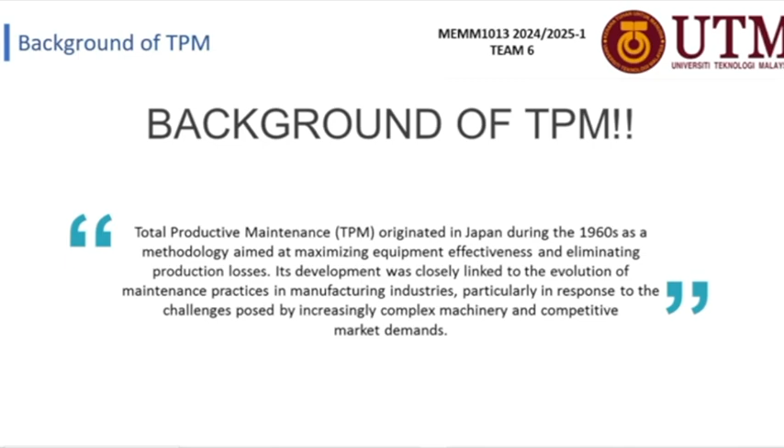Next slide. Let me go through the key milestones from the 1950s until the 1980s. Around 1950, after World War II, Japan's manufacturing industry faced a need for efficient production to rebuild its economy. Preventive maintenance concepts were borrowed from the US, focusing on scheduled maintenance to avoid equipment breakdown.

In the 1960s, Nippon Denso, a supplier to Toyota, introduced productive maintenance to ensure equipment was always in good condition, enhancing its productivity. In the 1970s, Seiichi Nakajima, considered the father of TPM, formalized the concept by integrating maintenance with company-wide productivity improvement goals. TPM expanded its scope to include all employees, from top management to shop floor operators, aiming for zero defect, zero breakdown, zero accident. The Japan Institute of Plant Maintenance (JIPM) played a significant role in promoting and standardizing TPM.

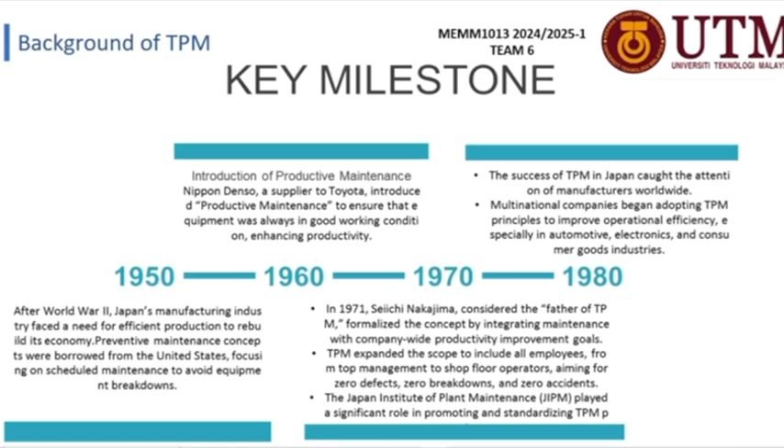In the 1980s, the success of TPM in Japan caught the attention of manufacturers worldwide. Multinational companies began adopting TPM principles to improve operational efficiency, especially in the automotive, electronic, and consumer goods industries. So next, the pillars of TPM. I will pass to my next member.

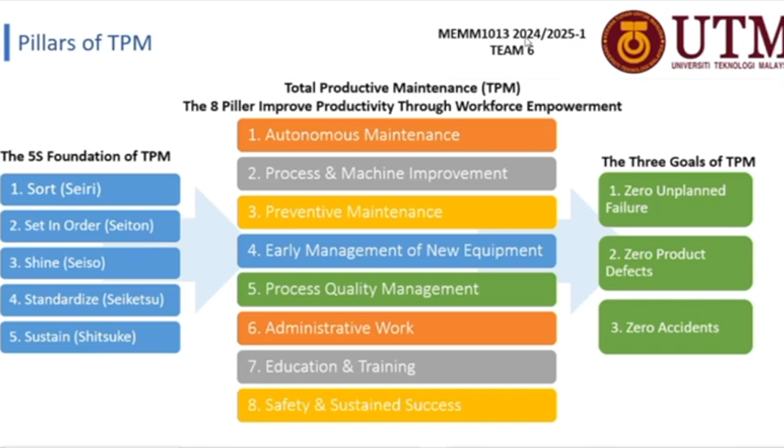The early version of TPM was introduced through the 5S method, which includes sort, set in order, shine, standardize, and sustain. After incorporating the 5S method, the 8 pillars were developed to improve productivity through workforce empowerment by focusing on proactive and preventive maintenance, with the objective of achieving zero failure, zero defects, and zero accidents. Let's briefly describe each pillar.

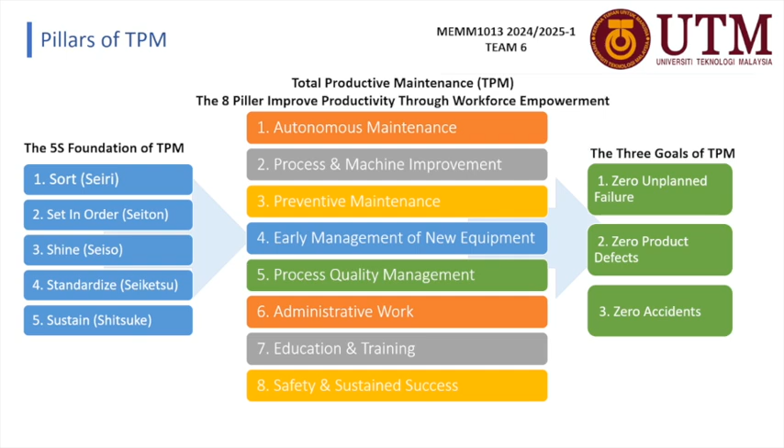The first pillar is autonomous maintenance, which focuses on the operator's responsibility, daily preventive maintenance, and enhancing equipment reliability. Second is process and machine improvement, which focuses on process efficiency through forming small teams to reduce wastage. Third is preventive maintenance, which aims to predict failure rates, plan for maintenance, and extend equipment life.

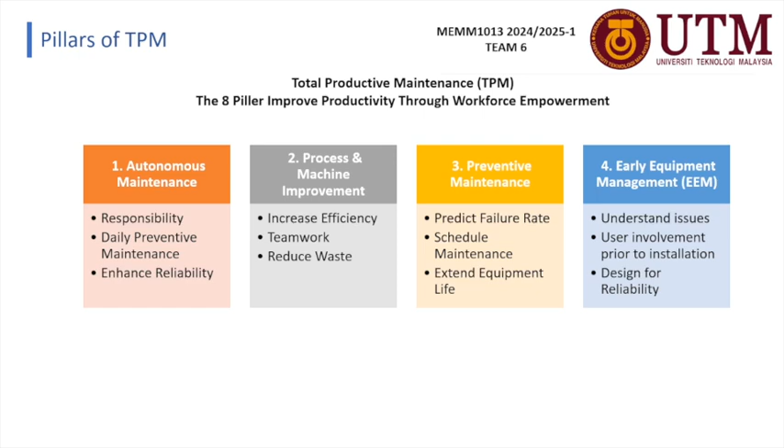Fourth is early equipment management, which focuses on understanding equipment issues and involving users prior to installation, aiming to design for reliability. The fifth pillar is process quality management, which determines errors, minimizes defects, and ensures proper history records of root cause analysis.

Sixth is administrative work, which focuses on resource allocation and heavily involves the user for better understanding and reducing waste. Seventh is education and training, which enhances employee skills, builds self-confidence, and ultimately reduces errors during the process. The final pillar is safety and sustained success, aiming for workplace safety, business compliance, and eliminating potential risks.

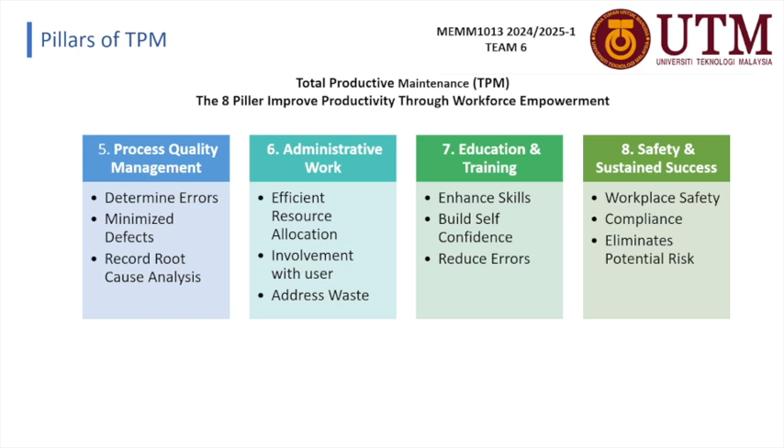Thank you. Hi everyone, I'm Yong and I will continue briefing on OEE. OEE stands for Overall Equipment Effectiveness. It is a lean tool and metric that can reflect the effectiveness of production equipment or machines during manufacturing time. Measuring OEE provides useful insight about the performance of the production process and how to methodically enhance process efficiency. The OEE index is calculated by multiplying 3 factors in percentage: availability, performance, and quality.

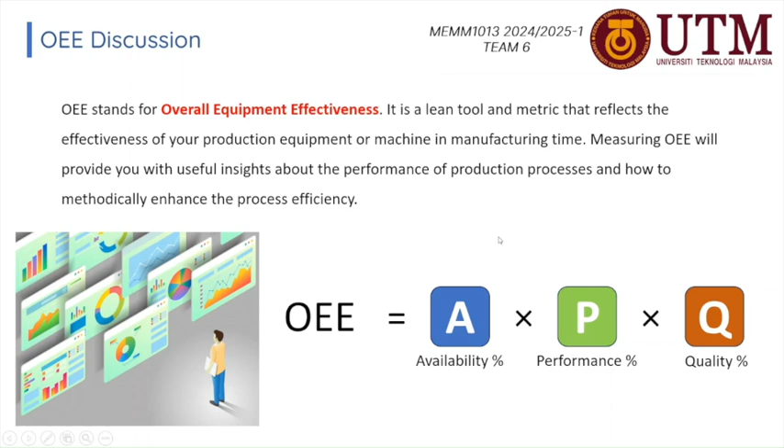Let me further explain how to calculate the 3 factors. The first factor is availability. Availability measures the percentage of equipment available operating time against the planned schedule. The formula is runtime divided by planned production time. Runtime is the actual machine operating hours during the shift.

It excludes the unplanned downtime. Unplanned downtime is an unpredicted incident that causes production or the machine to stop running. For example, machine breakdown, minor stop, model changeover, setup of machine tools, or material shortage issues.

Planned production time is planned and scheduled in advance for the manufacturing running hours. For example, we consider one production shift as 12 hours, with total production break time in one shift being 1.5 hours, and planned maintenance schedule being 0.5 hours. So total planned downtime will be 2 hours. 12 hours minus 2 hours leaves a balance of 10 hours, which will be the planned production time.

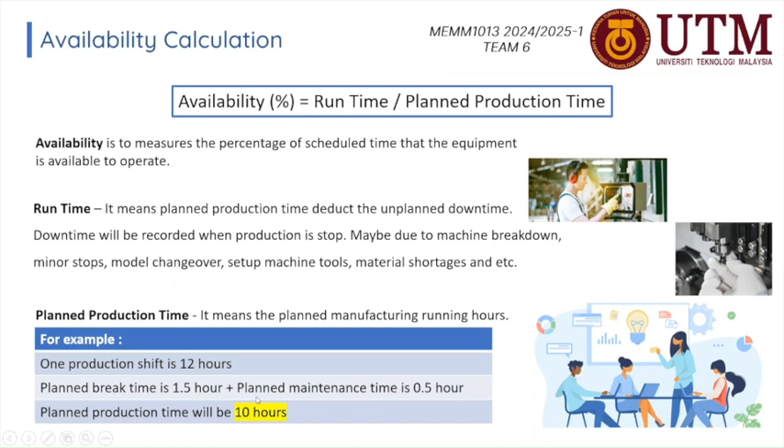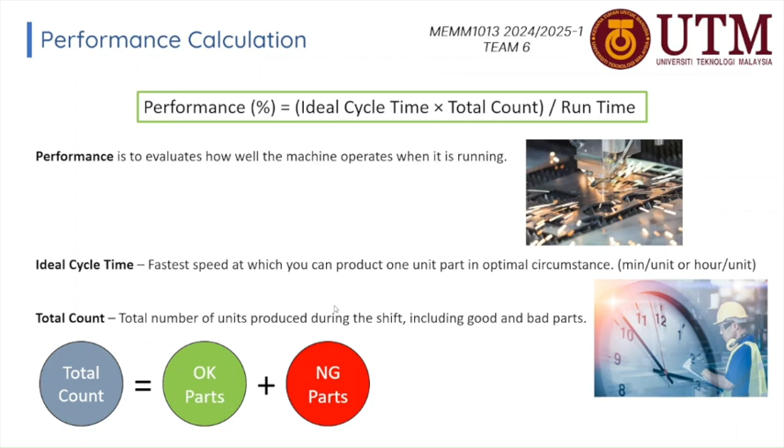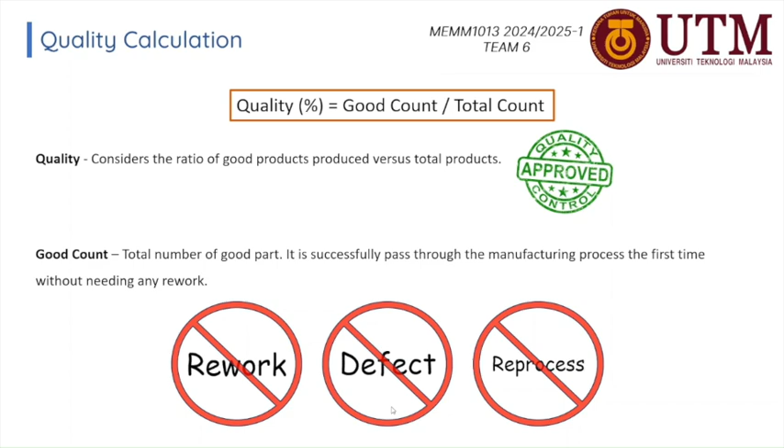The last factor is quality. Quality measures the ratio of good part quantity versus total count quantity. The quality factor identifies whether the machine or equipment is producing good parts. The good count means the part passed one time without any rework, defect, or reprocessing.

After we calculate the OEE percentage, how do we consider the value good or bad? In the OEE score benchmark, above 85% is world-class OEE. At 60% OEE is a typical percentage across the majority of industries. Therefore, a company could base on the OEE value to implement Kaizen activity in specific sessions to improve the OEE score. For scores below 40%, it indicates a not uncommon manufacturing process with a lot of easy improvements that can be done to significantly increase the OEE score.

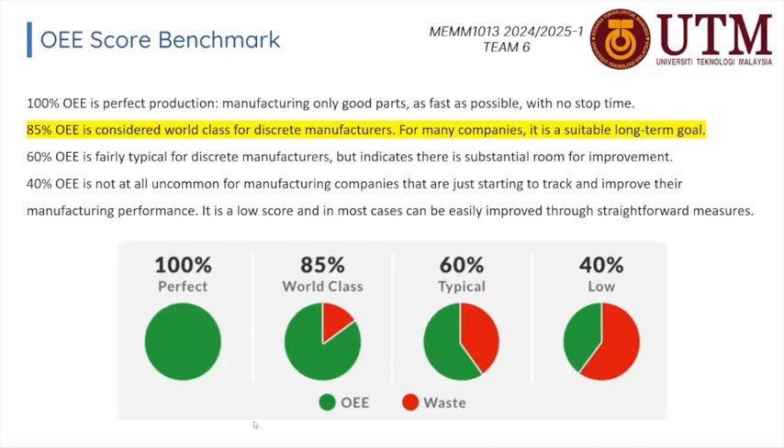I will hand over to the next team member. Thank you. Welcome and hi all, my name is Dayan Nurhan. I'll represent Team 6 to share with you two case studies, mainly on total productive maintenance TPM at Malaysia Airlines, and the second one, the implementation of overall equipment effectiveness OEE at ABB.

Let's look at the first case study at Malaysia Airlines. Malaysia Airlines is our national carrier, which has a rich history dating back over 50 years, evolving from a government agency then privatized as a prominent corporate entity in Malaysia. It has approximately 110 aircraft flying across 6 continents to over 100 cities in the world.

In recent years, we have heard that Malaysia Airlines faced a lot of challenges. Amongst others are, first, economic and industrial crises such as the Asian financial crisis; second, global events like the 9/11 attacks, the SARS outbreak, and rising fuel costs which have severely impacted the aviation sector.

Third, competition from low-cost carriers (LCC). Fourth, operational inefficiencies due to high maintenance costs and aging fleets.

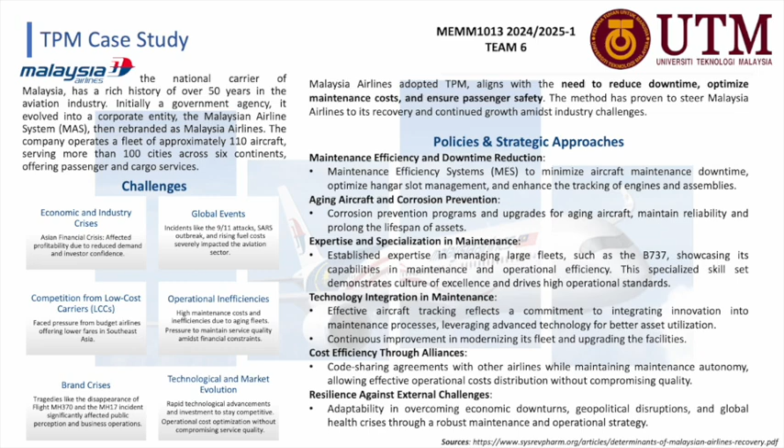Moving on to the next case study on OEE. ABB, headquartered in Zurich, Switzerland, is a global technology leader that serves diverse industries with the goal of enabling a sustainable and resource-efficient future. ABB delivers innovative solutions that optimize production processes and energy efficiency.

They have introduced OEE as a financial KPI, as OEE is now universally accepted as a significant KPI. ABB highlights the financial impact of optimizing overall equipment effectiveness through its digital solution. By aligning OEE with business objectives, ABB enables organizations to translate operational improvement into measurable financial gains.

As you can see here, they have simulated an OEE of 60%, derived from 77% availability, 85.7% performance, and 91% quality yield. Through OEE of 60%, the earning profit is 11.286 million, with return on employed capital (ROCE) of 6.81%.

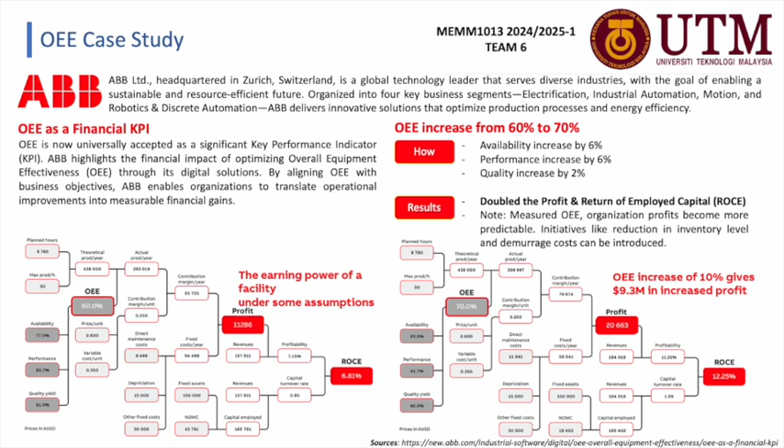In conclusion, TPM methodology and the OEE indicators have evolved since the 1960s and are now widely implemented across various industries, paving the way for a resilient and progressive future.

Embedding TPM and OEE into organizational practices has provided a clear pathway to, first, alignment with organizational goals, where direct contribution to achieving the company's vision and mission is driven by operational excellence, enhancing productivity, and fostering a culture of continuous improvement.

Second, improved efficiency and cost optimization by minimizing equipment downtime, improving reliability, and optimizing resources. Third, empowered workforce - adding value to human capital, creating a proactive culture, and increasing skill development that aligns with organizational mission.

Fourth, sustainable competitive advantage - higher quality products can be delivered, meeting customers' demand efficiently and maintaining a competitive edge in the market.

And lastly, support for strategic vision. TPM and OEE can act as enablers for long-term strategic goals, driving organizations towards operational excellence, innovation, and sustainable growth.